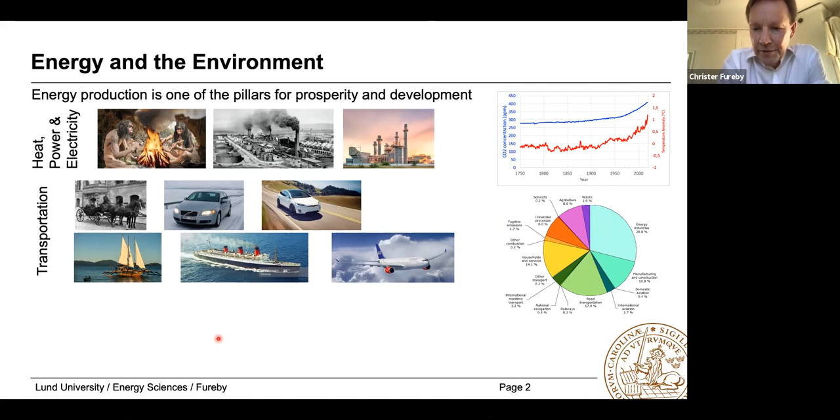And we can divide up the amount of energy being produced into different sectors. We can clearly see that the key, or the biggest sectors, are transportation, manufacturing, and electricity production, and they're dominating. So it's in these sectors that we have to make the biggest cuts. Aviation, on the other hand, is not consuming more than a few percent of the world energy and is responsible for approximately 3 to 5% of the global warming. So that's not that crucial, but the problem is that the carbon dioxide being emitted is being emitted high up in the atmosphere, where it also makes the biggest damage.

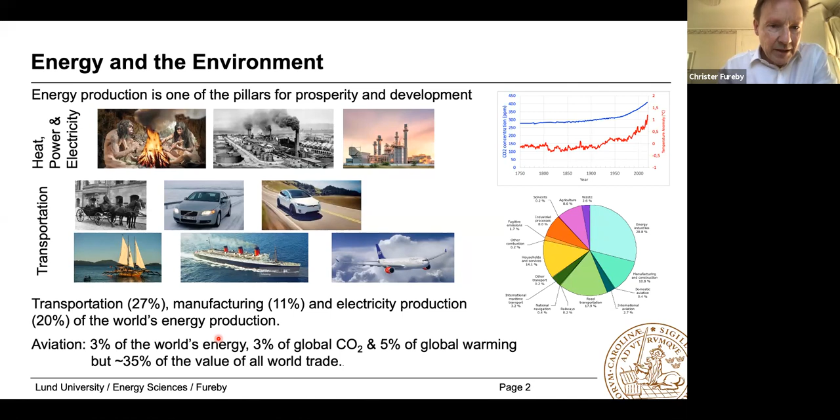So I will be talking about different ways of trying to mitigate some of these effects, especially what is done in Europe and so on. The key issue is, of course, to replace fossil fuel energy production by CO2 neutral energy production, and that can be done in different ways, depending on different purposes, of course.

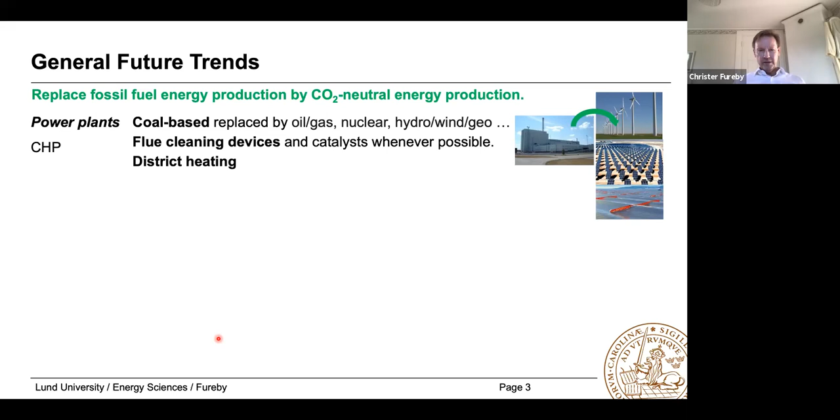We have a lot of power plants. Some of them are coal-based, and they're rapidly being replaced by oil, gas, nuclear, and then further on towards really CO2 neutral energy production, such as hydro, wind, and geothermal. There is also a lot of additional work done to make these power plants cleaner, like flue gas cleaning, and gradually moving into district heating, which I think we're pretty well off in Northern Europe in that sense.

But we have also the transport sector. And there we see a very rapid transition from diesel and gasoline engines towards batteries, towards fuel cells, and towards hydrogen engines. This is really an interesting phase to follow, and it's possible to do on road transportation. It becomes more challenging when it comes to construction equipment and heavy trucks, but there is a lot of research going on in that direction.

For jet engines and power generation gas turbines, the process is more complicated, especially for engines that are actually flying, simply because of the safety issues with changing fuel, and also the complexity of generating carbon neutral fuels with the same properties essentially as conventional Jet A1 fuel. So this is really a challenge that we're facing.

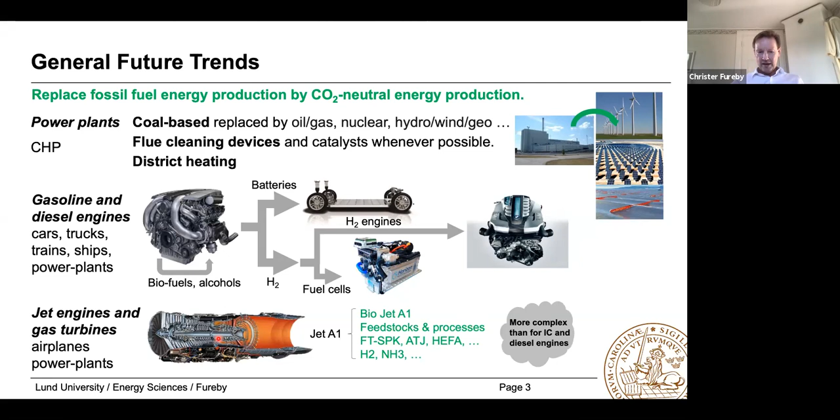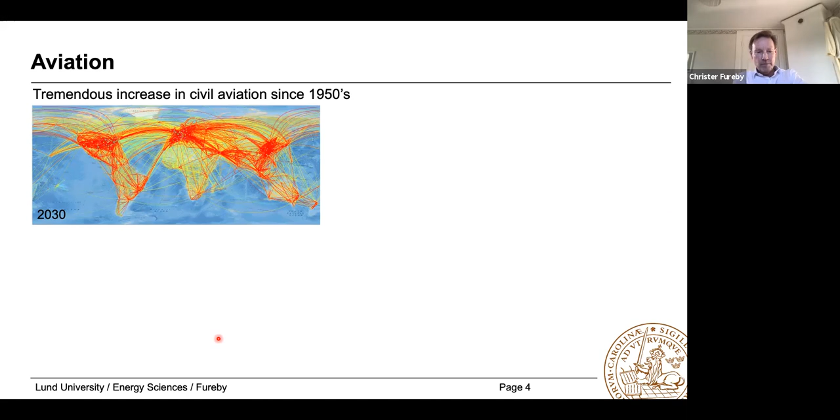As I said before, aviation contributes roughly 3 to 5% of CO2 and global warming, but roughly 35% of the trade. So even if it's not that big in terms of global warming effects, the influence on society is pretty big. And the main issue is what we typically see when we look at the sky - the contrails, which is essentially ice crystals formed by the combustion products. There is a number of ways to try and alleviate this.

One is, as I said before, move from conventional Jet A1 to some kind of synthetic or biojet fuel, and there are different ways to do that, but neither of them is very simple or well understood. But then we also have other options like going to electric aircrafts, and this might be a feasible opportunity, but then we probably have to restrict it to short routes, and then maybe trains is an equally useful transportation method.

There is a lot of work going on also in terms of hydrogen, and I've taken two images here. One is the Cryoplane, which is a concept airplane developed in an EU project in Europe some 5 to 10 years ago, when they were looking into the possibilities of powering civilian aviation with hydrogen. And what you see is, of course, a large tank of liquid hydrogen on top of the passenger cabin. Potentially this might work, but the engines have to be completely redesigned to burn hydrogen, which is of course an issue.

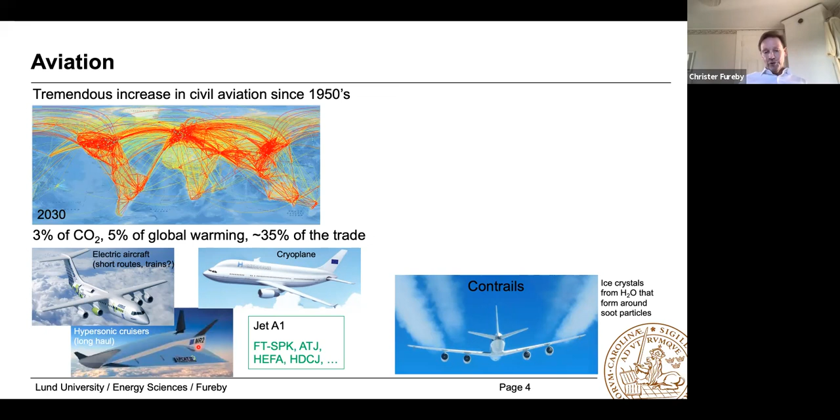Most of the engines that we will be having for aviation will be some kind of jet engine technology. Jet engines are well known - they have high efficiency, they're safe, it's a well-proven technology. The key issue is which fuel to use. Do we need to modify jet engines to burn alternative fuels? For some, definitely yes. But there is also the option of combining research here with what is needed for power plants, because many power plants actually use aviation jet engines as the core.

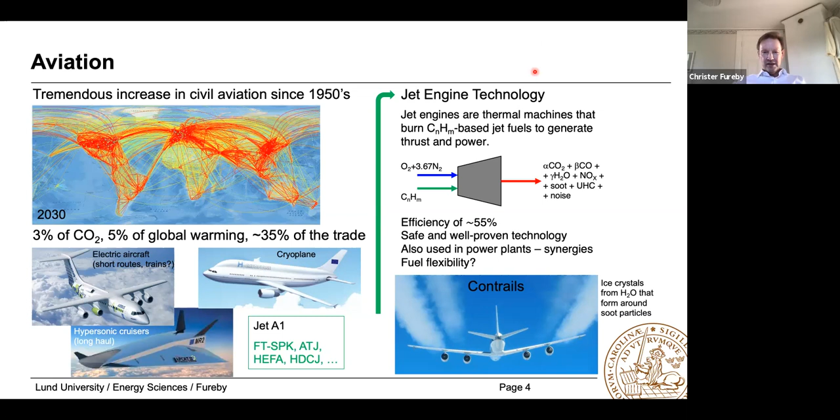So yeah, this is kind of what I said before. These are the 3 different concept airplanes that are being looked into. We have the Cryoplane, as I explained. We have an American company, Boom Supersonic, that is developing supersonic airliners. We're actually collaborating with them in an EU project that I will be talking a little bit about later on, and there we're focusing on both hydrogen and biojet fuels for their engines.

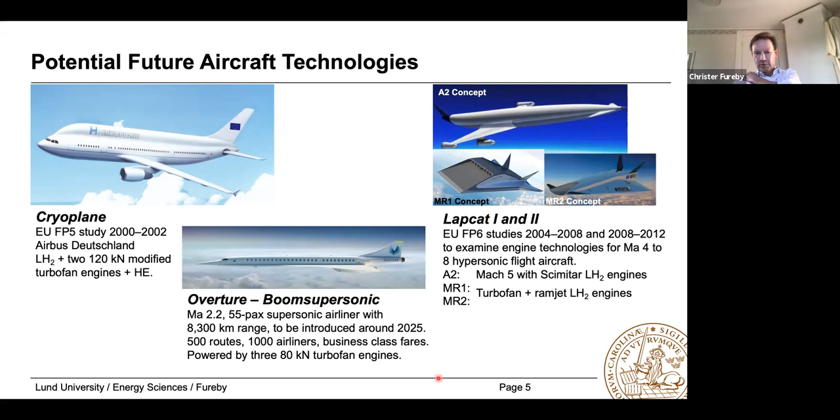And then we have the predecessor to the Stratofly project that I mentioned before, namely the LAPCAT projects, where we have over almost a decade in Europe looked into hypersonic flights based on hydrogen. This actually looks like a very futuristic approach, but technology-wise, it's reasonably mature. There are some technical issues that remain to be solved, and we think it can actually be integrated into the airline system without any huge problems. So this is ideas for the future, basically.

If we take one step back and think about the engine technology that we have at our disposal and what we think can happen in the near future, we of course have turbojet and turbofan engines. This is what we typically use today.

There are some interesting development paths there going towards open rotor, different engine cores. But I guess the key issue will be to change from

conventional kerosene to some kind of biokerosene with similar but somewhat different combustion properties. Then we have afterburning turbojets and afterburning turbo ramjet engines, and this is what we see in fighter jets, but also what we saw in the Concorde airliner, and this is what might be the key technology in future supersonic airliners. So they can kind of go up to Mach 3 in terms of speed.

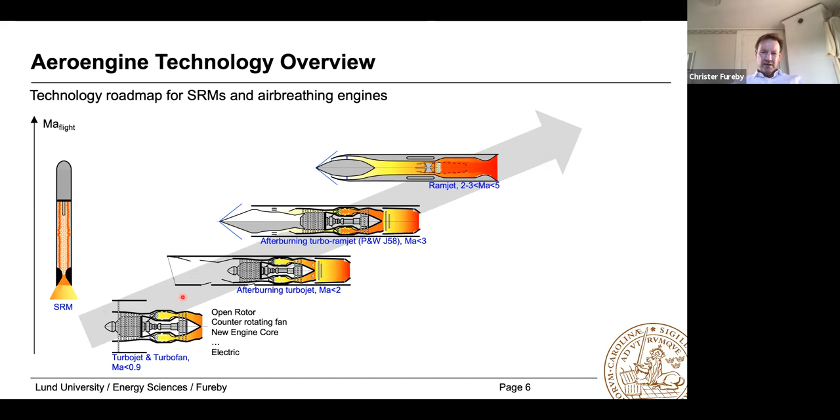But if we want to go even higher, we have to go towards ramjet engines. And that's again a different technology, but still having combustion occurring at subsonic speeds. If we want to go even further, we have scramjets, and this is where essentially combustion occurs at

supersonic speeds. And ideally, you would like to be able to traverse this range of Mach numbers seamlessly with one and the same engine.

And this is really the problem, because turbojet engines typically work up to Mach 2.5 to 3. And if you want to go beyond that, the losses in the engine will be too large. So that's really not feasible.

So then you have to have some kind of transition towards a ramjet engine. And that's quite a big transition step. And again, if you want to go further, you have to have another transition step into a scramjet engine.

But that is at least believed to be able to be maintained within the same engine duct. So basically, then we're talking about a dual mode ramjet engine that can operate both in a ramjet mode and then transition gradually to a scramjet engine.

And ideally, these engines don't really have any moving parts, whereas the turbojet and turbofan engines do. So if we really want to be able to explore this range of velocities that we're talking about here, we need to develop something that can actually integrate both a turbojet engine and a dual mode ramjet engine.

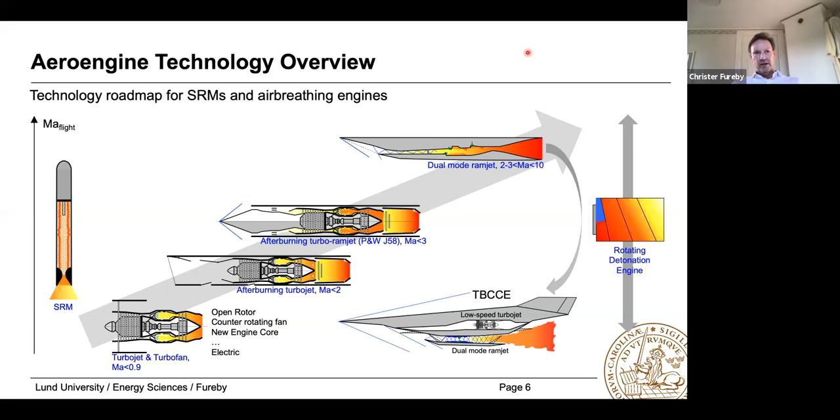But also more recently, there has been some rather different developments in terms of rotating detonation engines, which is a radically different concept, exploring detonations instead of deflagrations as a propulsion concept. And RDEs also seem to have a very big potential for future power generation and propulsion technologies.

averaging about C14, something like that. And it's a mix of different types of hydrocarbons, paraffins, aromatics, and so on.

And the interesting thing is that the engines are really developed based on this fuel. So if you're changing the fuel, ideally you would also like to change things with the engines. It can be simple things such as the spray injectors, but it might also need to change other things.

And what we talk very much about today is biojet fuels, or sustainable aviation fuels. This has been discussed for quite some time, and there is a wide variety of ways to produce these kind of fuels, from different feedstocks. For example, we can use various kinds of fats, we can use algae, we can use forest residuals, etc.

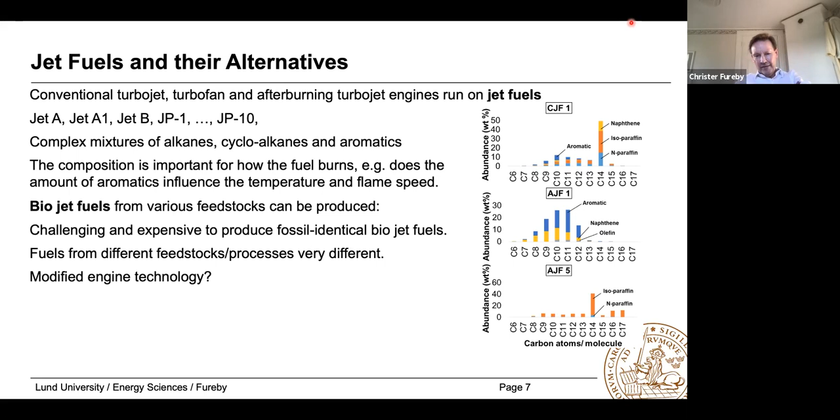Then we probably have to do something with the engine technology. So this is really a very complicated situation, and I think it will need a lot of research in the future to deal with.

And then we also, of course, have hydrogen, liquid hydrogen, and I mentioned that in terms of the Cryoplane and the Stratofly engine. But if we want to use that as fuel for a gas turbine or a jet engine, we need to think carefully about how to do that, because the flame speed for hydrogen is much higher than that of conventional kerosene-based fuels. And that will again require some different types of engine technologies.

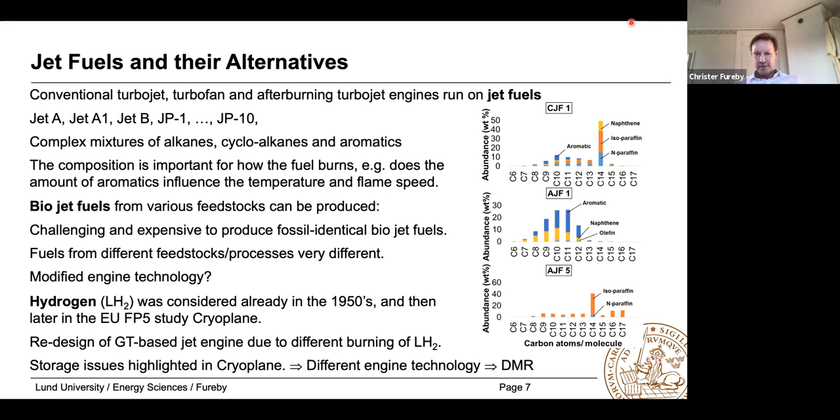So, okay, we have a number of challenges ahead. What tools do we have to investigate these?

One is, of course, small-scale experiments and corresponding simulations. And this is where we can use non-intrusive laser diagnostics, for example, to investigate the details of a flame.

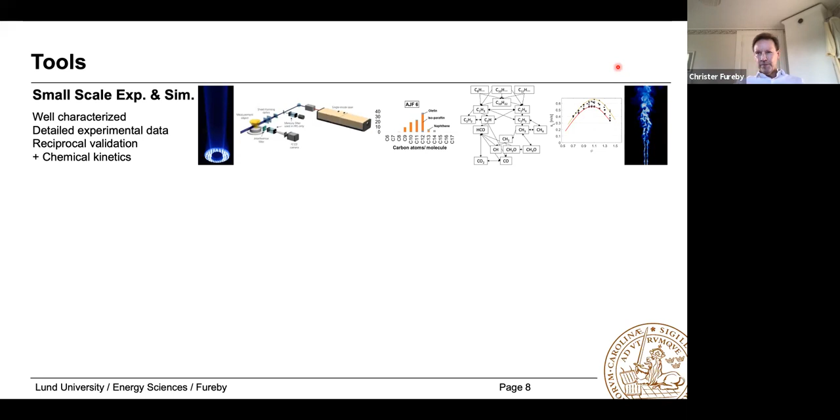Similarly, we can extract detailed information about fuels, we can develop reaction mechanisms, and we can do simulations rather cheaply to actually test that these mechanisms work and that things burn the way that we think, for a laminar flame configuration, or in a weakly turbulent flame configuration, for example. So that's one option, and it really governs the small intrinsic details.

But then when it comes to a more complicated situation, which is approaching how an engine operates, it becomes all of a sudden much more complicated. The experimental apparatus to be used is much more complicated and larger. We can still use non-intrusive laser diagnostics, but it's not always the case that we can look into the combustion chamber where we would like to. So we might be very much restricted in terms of fields of view.

And then finally, we have CFD methods that can help us. CFD methods don't really tell us the truth, as experiments do. They give some approximate picture of the reality as governed by the equations.

There is often a lot of models that we have to supply. I've talked about reaction mechanisms, but also turbulence models and things like that. And they will require rather large computational resources if we want to apply them to big problems.

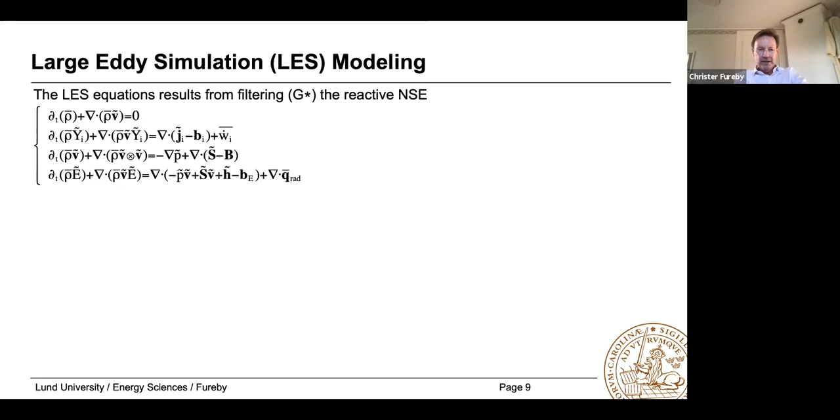And in this methodology, we essentially filter the reactive Navier-Stokes equations over small regions in space. And the smaller we make them, the more exact the model will be, but the more expensive it will be. So this will be a trade-off between computational cost and accuracy, to some extent.

And we have to feed these models, or these equations, with models for the flow physics, essentially, that we're not resolving. So the subgrid stress and flux terms, which basically deal with the unresolved transport terms, they have to be modeled.

We have to model also the filtered reaction rates, or the influence of the chemistry. The chemistry typically occurs on very small scales that cannot be resolved, and therefore we will get some kind of coarse-grained chemical source terms that will enter the species equations. And the effect of turbulence there on the chemistry needs to be modeled.

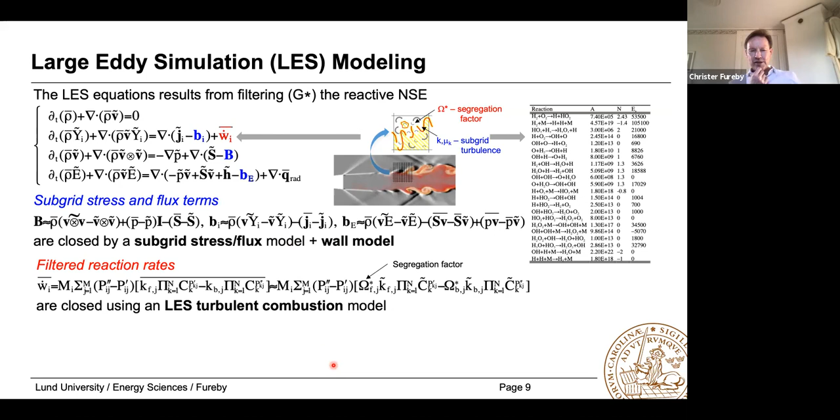And this is a very complicated thing to model, simply because the chemistry is so non-linear. And we really don't understand how to do the reaction rate modeling today, whereas I think we have a pretty good idea of how to do the subgrid stress and flux terms. And this is really where we usually stop talking about modeling. But we have additional processes that we often forget, and one of those is radiation.

Typically we're talking about flames that have temperatures on the order of 2000 Kelvin, and they radiate a lot of energy, which enters the energy equation. So this is a term we need to think about. Without discussing unresolved scales, just the basic flow physics on resolved scales, we need to think about how to incorporate thermal radiation in a simulation. It changes the temperature field and the interaction between different regions of a flame, and this is equally important for furnaces as for jet engines and ram/scramjet type engines.

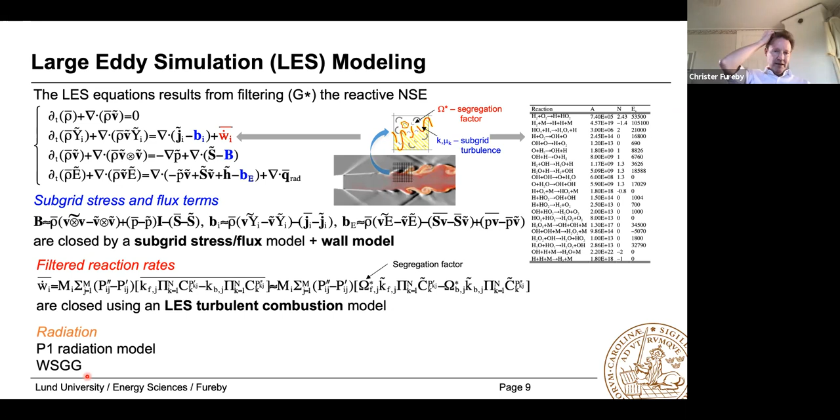There are two different ways to do this: one is a spherical harmonics based model, the P1 model, and the other is discrete ordinates methods. The P1 model is probably a reasonably good compromise, and I think it's better to incorporate that part of the physics using a simple model than to simply neglect it. So I won't say very much about this, but I want you to be aware of it.

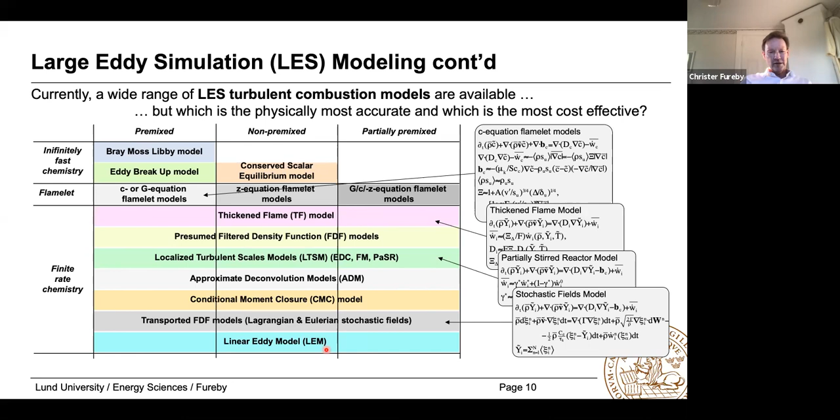Numerics is of course also another key ingredient here, and it's equally important as modeling the reaction rates or modeling the turbulence part. The numerical tools we use must be well adapted to the problem we have.

Typically we're talking about three different types of phenomena that we want to be able to incorporate and develop accurate numerical schemes for. One is convection, which is a transport phenomenon. These are challenging because we need to avoid wiggles and over- and undershoots. To do that we typically add a little bit of diffusion, but we also want to avoid adding too much, since it typically overwhelms the small scale turbulence.

So that's really a challenging trade-off to develop good numerical schemes for. Then we have diffusion, which is not that complicated and can be dealt with rather easily. But then we have chemistry, which is a highly localized process incorporating a very wide range of timescales. This is typically something we want to decouple from the flow simulation, and we typically use operator splitting to do that, then use carefully designed time integration schemes for solving stiff ordinary differential equations to deal with chemistry.

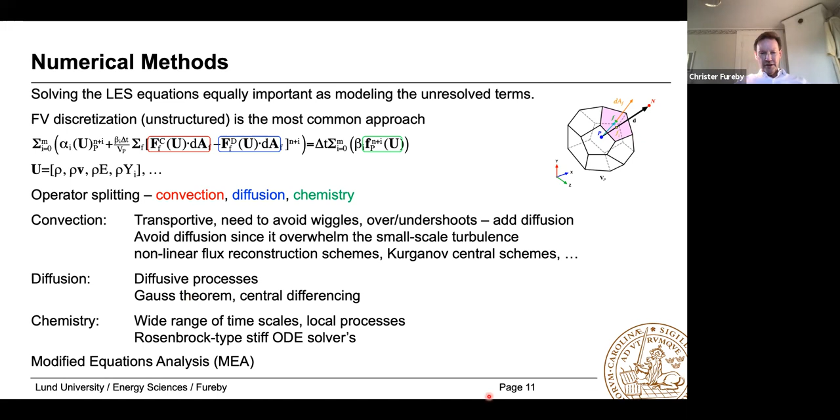A tool to help us understand the numerics, and especially the influence of the numerics on the physics, is modified equation analysis. This is a tool by which you go back from the discretized equations to some physical equations, but the terms that appear after this process, which were not there from the beginning, describe the leading order truncation error. This is basically the indirect effect of your numerical scheme, and it's something you need to be very well aware of and understand the influence of.

So chemistry, yeah, that's another topic, really a topic on its own.

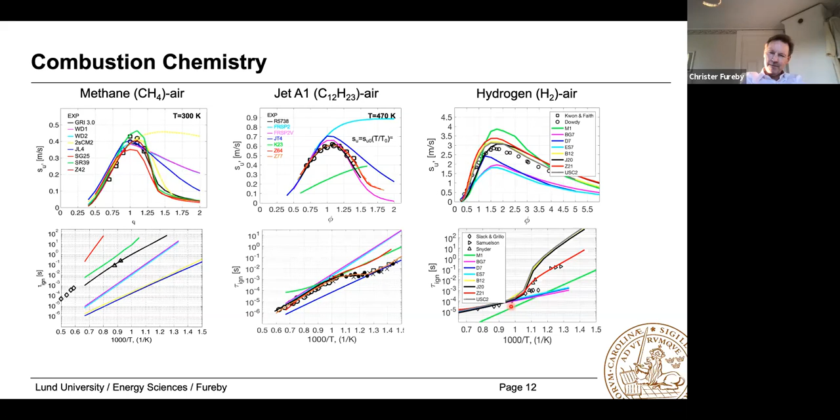So the big challenge really comes when we want to look at biofuels, biojet fuels for example. And we would like to test these in engines, but we want to know exactly what happens before we test them. So basically, we have to develop reaction mechanisms based on that. And for that, we need to use these simplified reaction mechanisms, such as this pathway-centric mechanism, where we only kind of focus on the most important part of the reaction system.

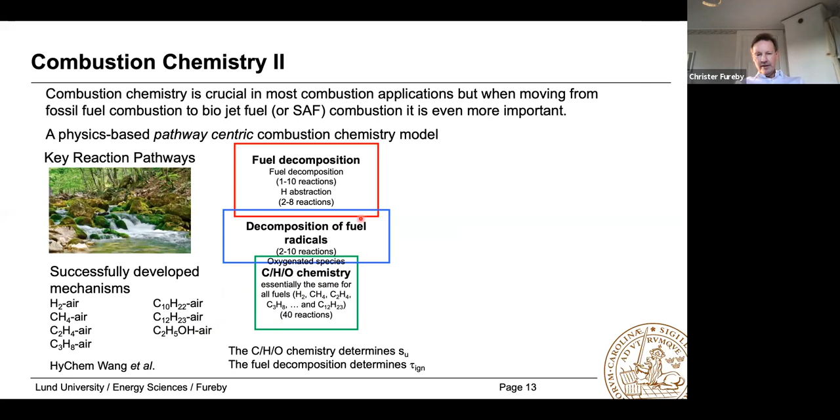And we have done that, especially when I was at FOI, we did quite significant work on that. We developed a methodology whereby we break down the combustion process into different subsets. We could actually freeze the CHO chemistry part and make that work for basically all different types of fuels. And then as we move higher up in this chain, we of course have to adapt the fuel breakdown reaction parts to the actual fuel that we're dealing with.

And this really becomes important when we're talking about changing from fossil jet fuel combustion to biojet fuels. Because as I showed before, biojet fuel has a very different footprint, and we have to be careful when taking that into account properly. So this methodology here will have a possibility of providing us with sufficient information to run biojet fuels properly.

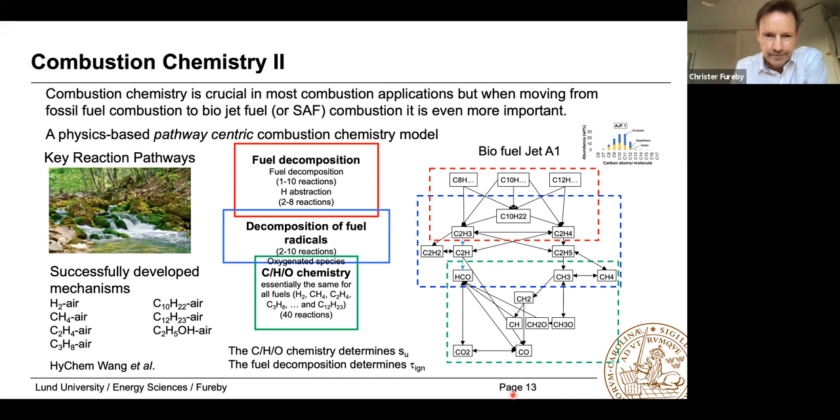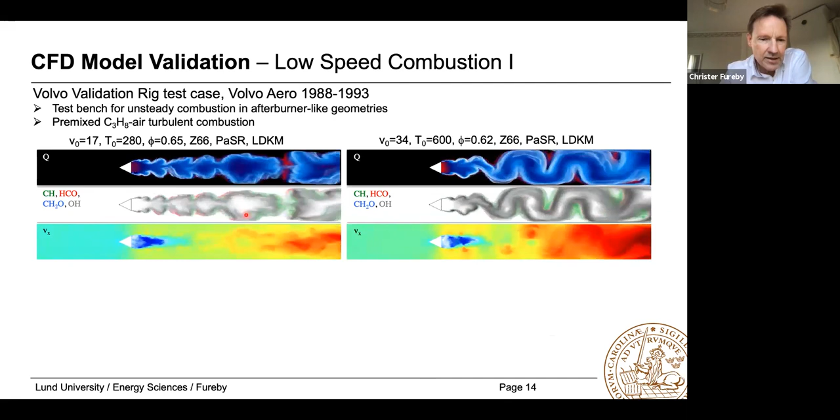And you're looking at two short animations of propane burning, lean propane. The two cases have different temperatures, 280 and 600 Kelvin, and this is why you see a very different type of combustion behavior. You're looking at heat release on top, various species, and axial flow velocity. And this is an ideal test case for comparing mechanisms and models.

But the advanced models and mechanisms are also more expensive. So being able to understand the limitations of the modeling and the reaction mechanisms and the interplay between these becomes all of a sudden very, very important.

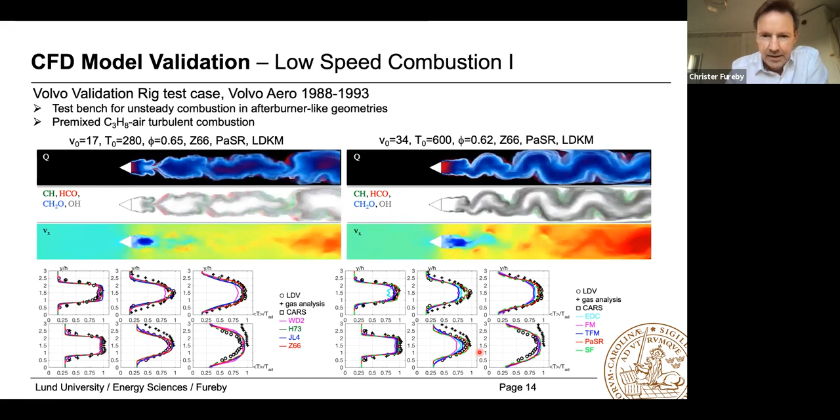And if you don't get the reaction mechanism right, you will not be able to compensate for that by having a more advanced or better turbulent combustion model. So this is really quite a lesson, I think, for us.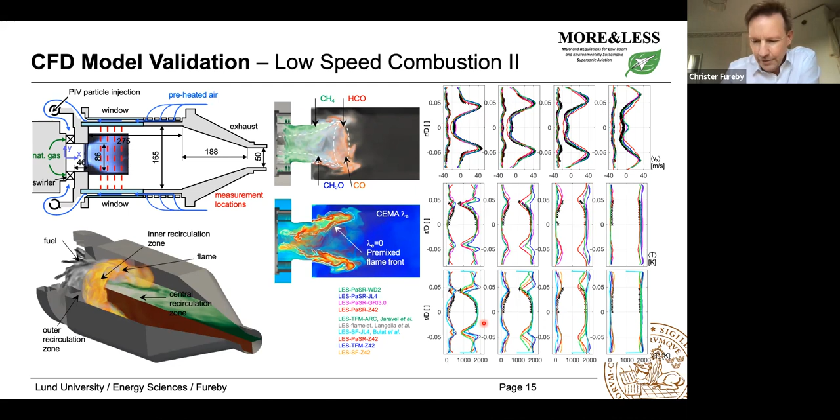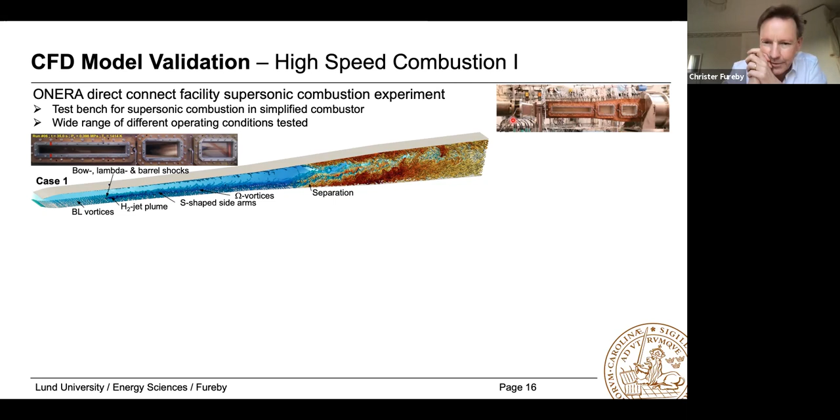We can take this to high-speed combustion as well. This is part of the EU project Stratofly, where we have experiments conducted at ONERA. You can see the test rig up to the right. It's a direct connect facility. We're burning hydrogen, and hydrogen is being injected both in the upper wall and in the lower wall. We're interested in trying to find out limitations for different operating conditions here. And this has been a very close collaboration between experiments and simulations.

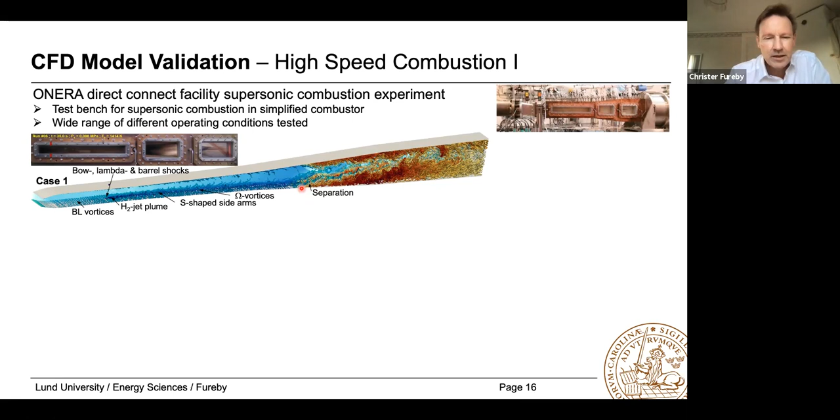This is one case where we have a comparatively low stagnation temperature at the inlet. Then combustion occurs quite far downstream, roughly where the flows start to separate. You can see that here in the experimental image as well.

Then we increase the stagnation temperature, and we clearly see that the combustion creeps up along the wall, and it starts somewhere here. It actually oscillates a bit back and forward. It does that in the experiments as well, which is quite interesting.

But it's also extremely sensitive to details here. We found that we had to incorporate also effects from a rough boundary layer. The experimental combustor had a zirconium oxide coating with a rather significant roughness factor, and that's something that we had to add in the simulation in order to get good agreement. So this kind of shows that it's very sensitive to even small details.

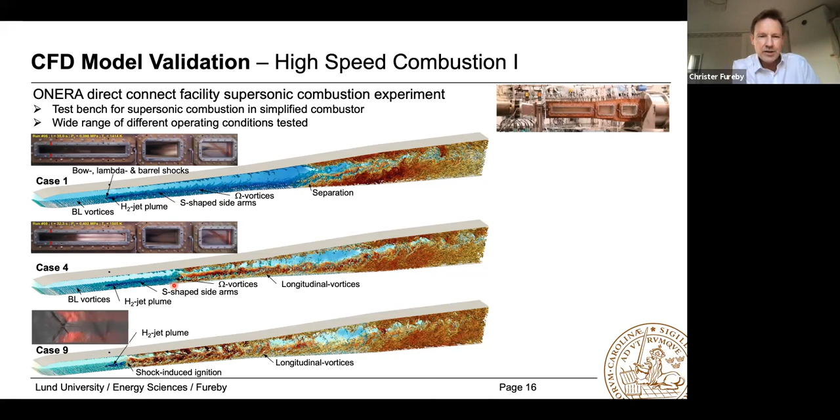Increasing the stagnation temperature even further, we have a very different process. We have shock-induced combustion or shock-induced ignition. And it's very interesting to see that the numerical simulation models, in spite of all the modeling that goes into them, are actually able to capture these three different modes of operation. I think that's a very strong indication that simulations are doing a rather good job, in spite of the shortcomings we know that many of the models or submodels have.

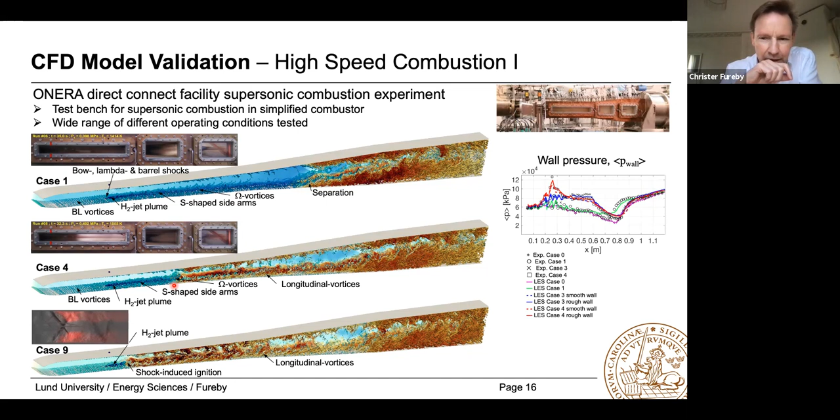And of course, we have looked at not only qualitative, but also quantitative comparisons, typically at the wall pressures. I will skip this case.

So now I want to spend a little time talking about this EU project Stratofly that I've been mentioning before. It really tries to investigate, or help us reach rather high TRL levels in understanding of dual mode Ramjet air transportation systems. This will not solve all the problems, but it might be one step towards helping us reach the goals of shortening the distance across the globe and at the same time reducing emissions.

So it's funded by EU. We have 11 partners from 7 different countries. We have an overall budget of around 4 million euros, and the project has been running for initially 30 months, but we had to extend it due to the pandemic until 36 months. And we're doing experiments and simulations jointly.

And the business case that we're focusing on here is actually Europe to Australia. Today we go by conventional airliners. There is a certain environmental impact on this, of course, and there is also impact on us when we travel because it takes 20 plus hours.

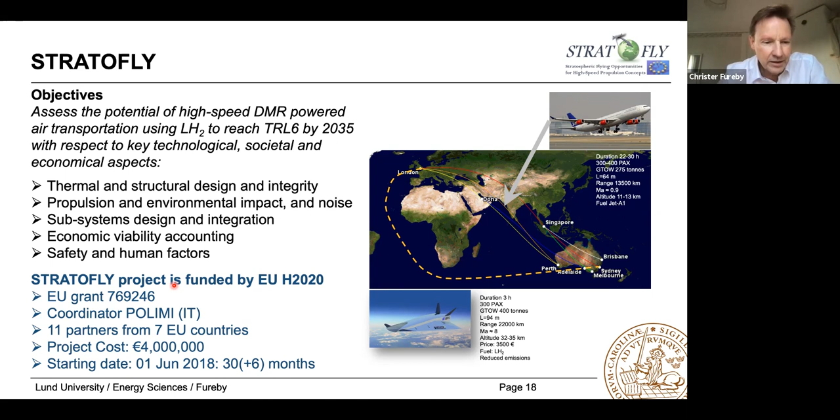We have been investigating this concept to see if it actually works. And although the project is not really ended yet, I think we can safely say that we can definitely reach the goals, even that of the price tag.

We have been working with a concept vehicle, which looks like this. This is a cutout. So basically you have a passenger cabin, you have an engine duct that goes through it. It's a dorsal mounted engine. I will show a zoom up of that later on. And around that you have a lot of liquid hydrogen tanks. It's a different type of airframe, based on a bubble architecture to make it sufficiently strong, whilst being of a different type compared to conventional airplane.

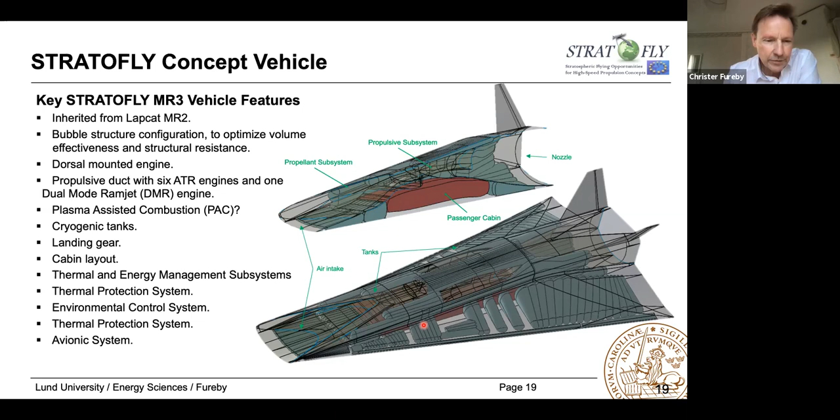The propulsion system looks essentially like this. There is a scoop-shaped intake, then a DMR duct, and on the side of this duct there are 2 air turbo rocket ducts containing 3 air turbo rockets each. These air turbo rockets are used for takeoff and landing, whereas the dual mode ramjet is used for cruise. This is the intended operation.

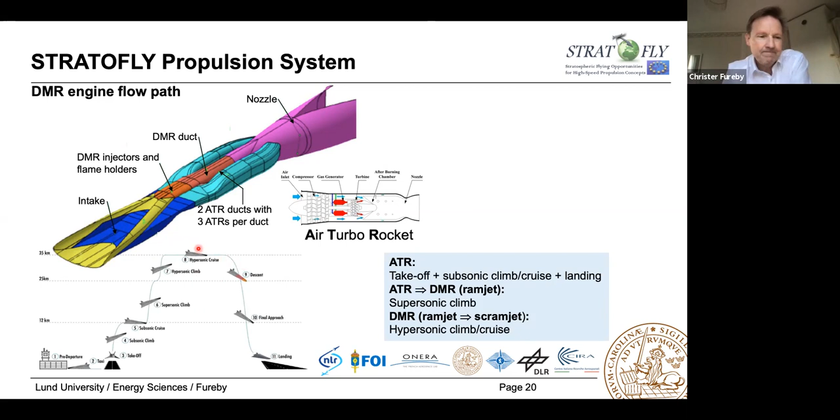Primarily, cruise will occur at an altitude of 28 to 35 kilometers roughly, so in the stratosphere, using the Scramjet engine. The environmental impact of the Scramjet engine is quite interesting because it will produce a lot of water vapor, and we're quite concerned about water vapor in the stratosphere. We're also concerned about the NOx emissions.

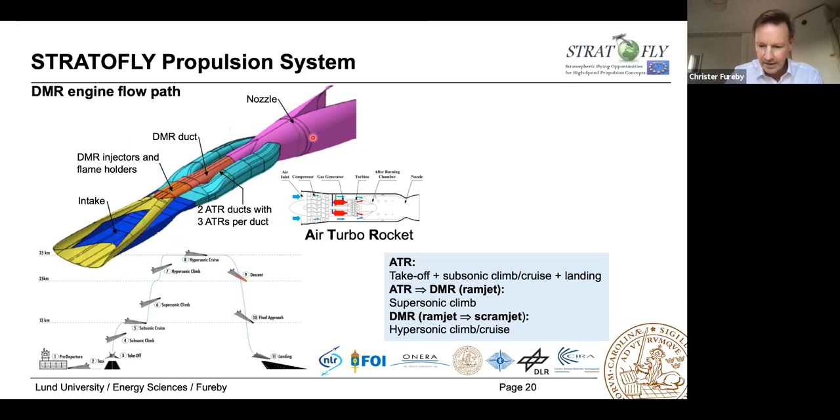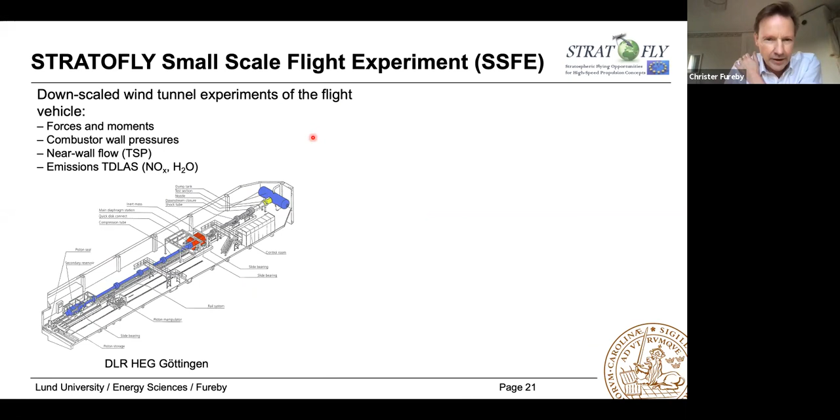Another interesting aspect is, of course, the transition between the ATR and the dual mode ramjet engine. To understand this, we have done combined experiments and simulations. The experiments are done primarily at DLR in Göttingen using their shock tunnel.

This is a picture of the actual shock tunnel. You can see the different piston systems. And down here we have an actual test section, and you have a dump tank here. This can actually provide us with the correct operating conditions for a downscale model of this flight vehicle that we can test for about 0.4 milliseconds. It's a short duration, but it will be the exact correct operating conditions.

In this test section, we have actually manufactured and inserted a downscale model of this flight vehicle. You can see it here in the green, inserted in the test section. The test section has a number of windows, so we actually have optical access to this.

The test section is supported by Kevlar wires, and these Kevlar wires are actually cut when the flow is coming from the left. So the experiment will be of a downscaled version, but it will be free flying.

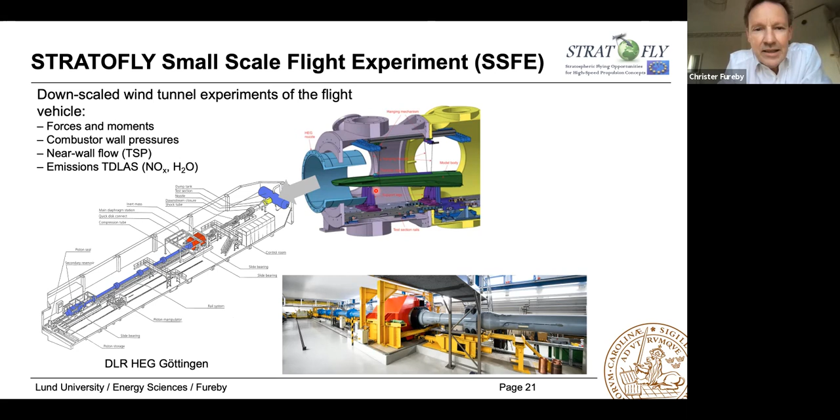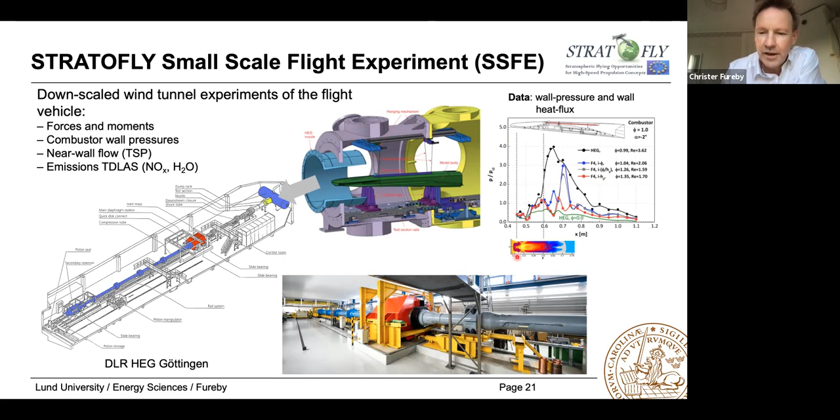Here we can actually test if the dual mode engine ignites, if it burns, and if it produces thrust. This is as close as we can come to actually flight testing something. The data that we will get is somewhat limited, but still quite interesting: pressure data on the walls, and also heat fluxes on the lower wall primarily.

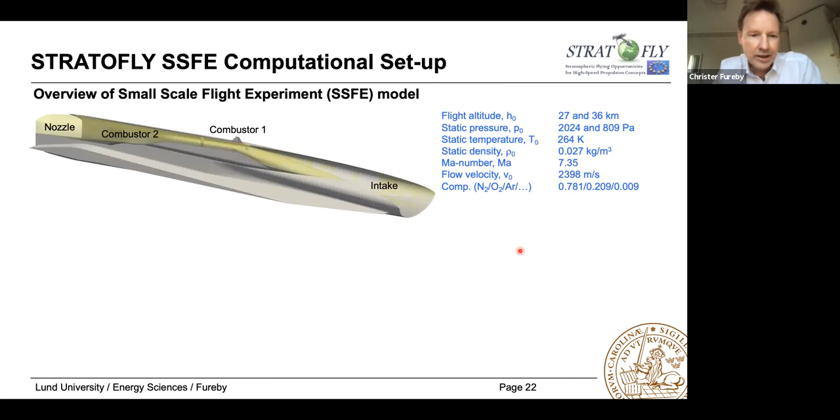Simulation-wise, we have generated a close replica of this. You can see the flight vehicle: there is an intake, there is a first combustor section, there is a second combustor section, and there is a nozzle. There are 3 struts: 2 semi-struts and 1 full strut.

At these, we inject hydrogen. Most of the hydrogen is injected in the front strut, on top of the front struts, whereas the remaining hydrogen is injected in the central strut further downstream. The hydrogen is quite cold, 167 Kelvin, cryogenic from the beginning, but the aim is actually to cool the combustor before injecting it.

We're looking at different operating conditions, different flight altitudes, so 27 and 36 kilometers with quite low static pressures. From a numerical point of view, we've created a number of grids ranging from 12, 45 and 90 million cells, something like that. Due to the very low running time of the experiment, we're fixing the wall temperatures.

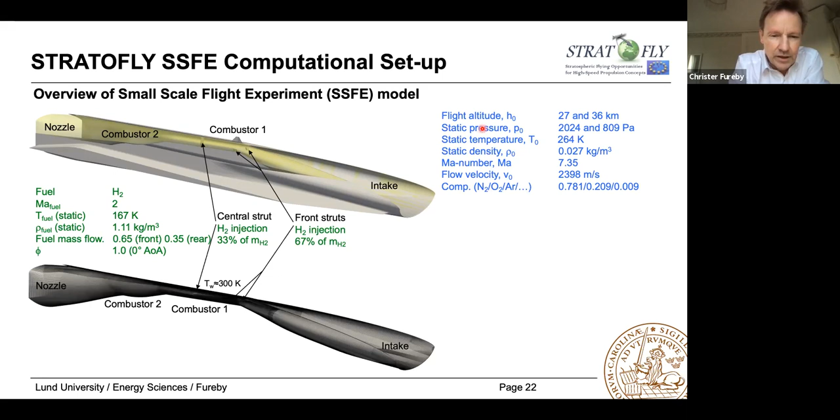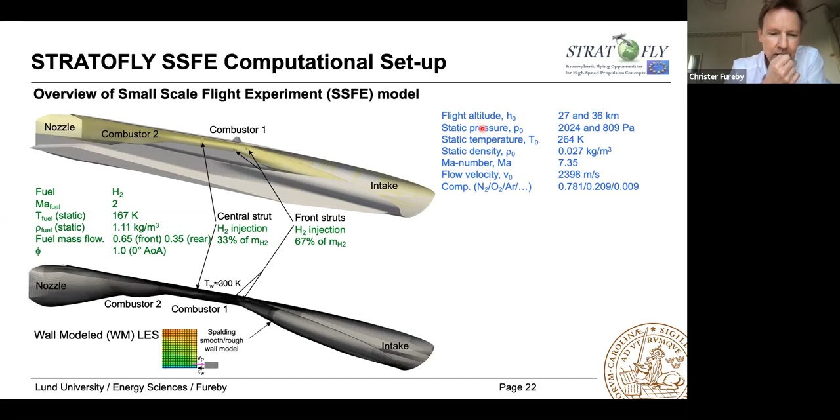That will, in a sense, allow us to compute the wall heat fluxes instead to compare with. Another thing that we're using is wall model LES, so basically we have a subgrid wall model to cater for what happens just adjacent to the wall. This is something that we have essentially borrowed from other areas as well.

You can see the semi-struts and you can see the full strut. The semi-struts have two injectors on top. The full strut has two injectors on the top and two injectors on the bottom, on the side, on the lateral side, so to say.

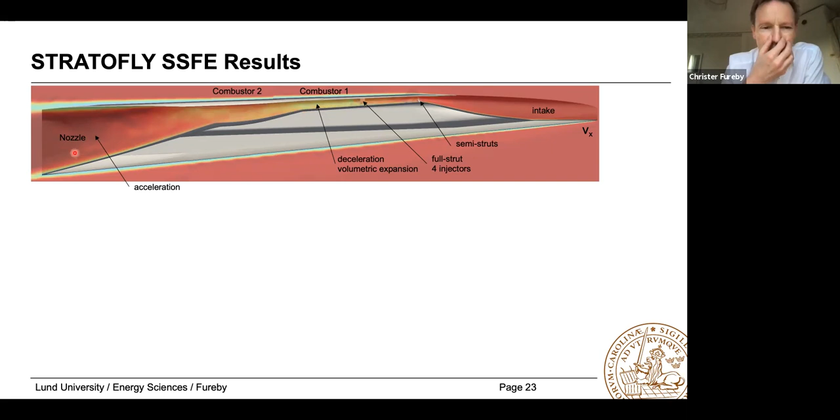What you can see is that you will have a compression. You don't really see it in the velocity, but you will have a slight decrease in the velocity here, and then a significant decrease in velocity here. This is due to combustion occurring, so there will be volumetric expansion and something similar to thermal choking if we have too much fuel there, but not in this case. Then we will have gradual acceleration, and we will basically have a positive net thrust, both numerically and experimentally for this case.

This is the corresponding temperature renderings. And here we have really cold flow, and you start to see there is boundary layer growth, compression, and some temperature increase.

The flow towards the end of the intake is very complicated. It will be dominated by two longitudinal vortices that stretch down into the combustor and multiple small-scale vortices. There is a vortex pair developing along the intake, very close to the center line, that will change the flow field quite a bit around the semi-struts.

There will be some ignition taking place in this initial part, but it will be mainly dominated by low temperature chemistry. Then further down, at the full strut, we have an additional set of shock waves and additional fuel, leading to very intense combustion. That gradually cools down as we expand through the second part of the combustor and through the nozzle.

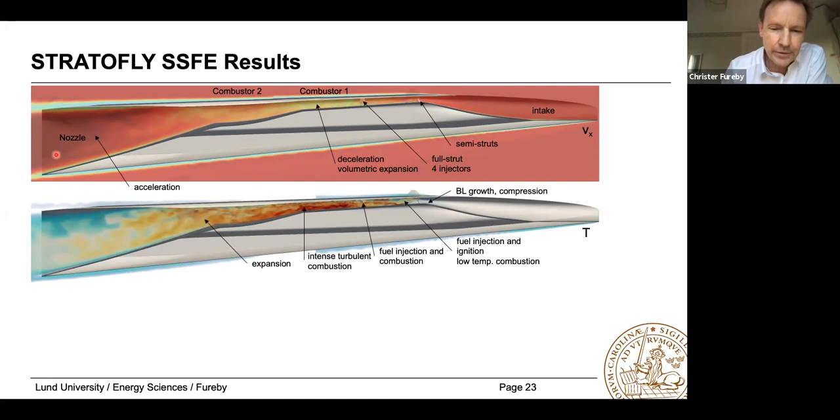The pressure is also extremely complicated. It's difficult to get a good representation of that because we have curved three-dimensional shock waves throughout the combustor. But the main pressure rise occurs here, which is also where we see the most intense combustion.

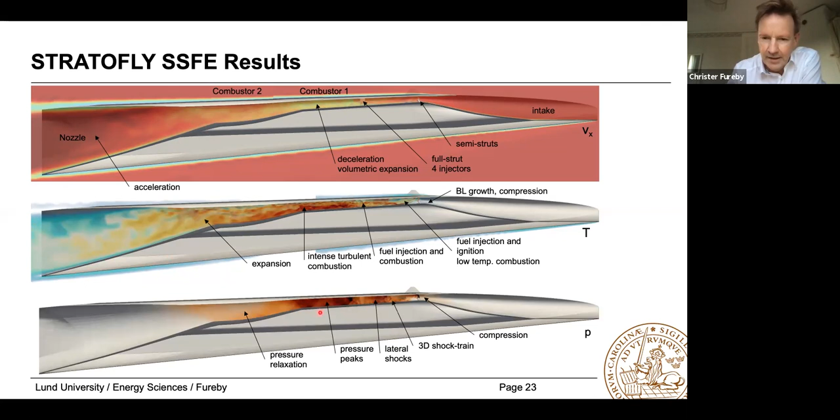These are images from the top, and we actually have experimental images similar to this showing wall heat fluxes. But it's interesting to see what happens with the flow in this direction. The walls are colored by pressure, and you can see hydrogen being injected from these two semi-struts, and also from the full strut here and here. This is volumetric rendering, so you see a high amount of hydrogen that gradually both dissipates and gets consumed. Far downstream, we have very little hydrogen, which suggests the efficiency here is reasonably good.

Next we look at low temperature chemistry, using HO2 as representative of that. We clearly see there are some remnants of HO2 already here, so basically the shocks covering the semi-struts will at least partly ignite the hydrogen. But due to the very high speeds, we don't see full combustion starting to occur until far downstream. So the ignition delay time of hydrogen is quite important, and that needs to be paired against the very high velocity through the combustor.

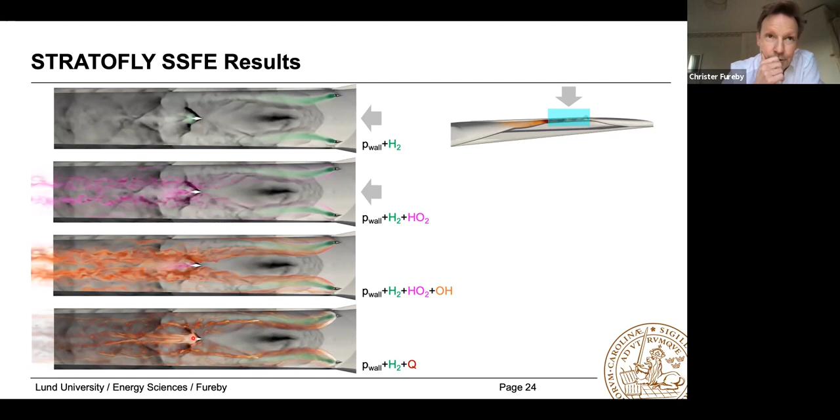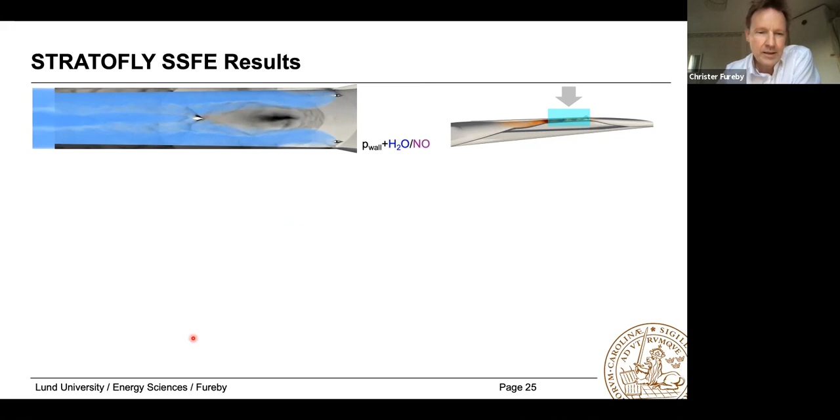All right, thank you. So here we have the water vapor being produced, and this is actually a problem, since we're producing a lot of water vapor that we don't want to emit into the stratosphere. Also, NO appears to be less crucial for this case compared to what we estimated. Primarily there is no NO being formed in the low temperature region, whereas it forms further downstream.

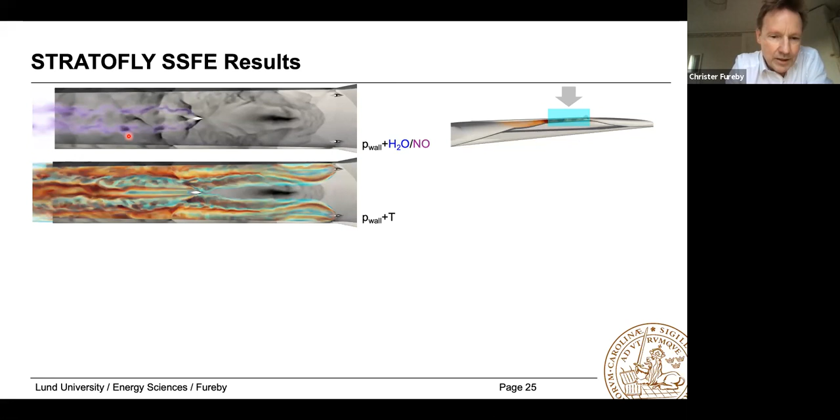This is also a picture of the temperature. It's quite complex, and it shows remnants of shock interactions and so forth.

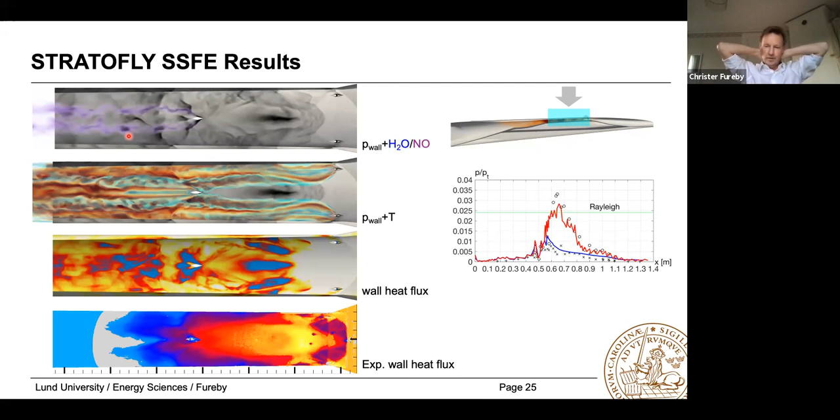We are able to compare computed and experimental wall heat fluxes, as well as pressure data along the upper wall between the simulations and experiments. In the pressure data, the blue line and red line correspond to non-reacting and reacting simulations respectively, so the impact of combustion here is quite significant. Again, we see that the simulations do a pretty good job capturing these differences.

So thank you for your attention. Thank you for listening to this presentation.

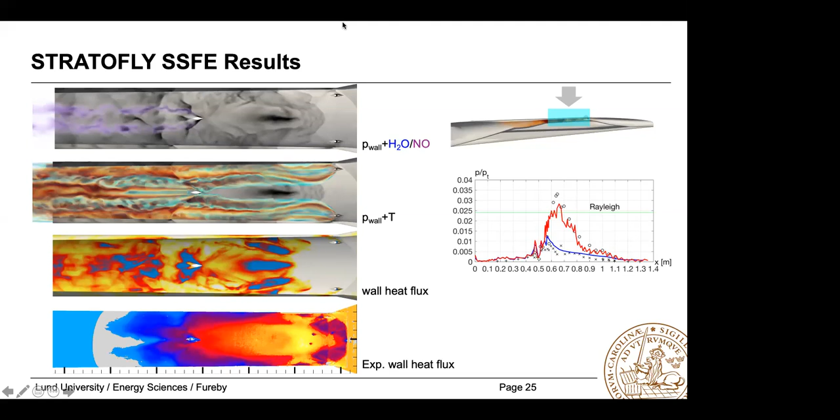Good evening, Christer. Hello there. How are you? I'm fine. How are you? Good, good. It's a pleasure. I wish you were here physically. I would like to have it there. You know, I've never been to Raleigh. Well, hopefully once the pandemic is over, you'll have the chance to do that. I really would like to do that. I really would like to come.

Yes, I really enjoyed your talk, by the way. It's always interesting to have a window to the applications. I've kind of been staying more on the laboratory scale, doing modeling work, and I think we need to work with both.

Doing the application side has always fascinated me, but it's always challenging, and it puts things in a different context. I think when we start doing applications, we really see what the methods we have can help us with, and what their constraints are, and that can give us new motivations to develop them further.